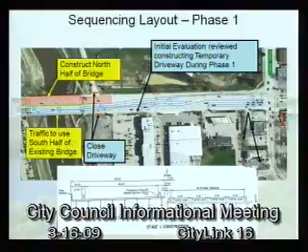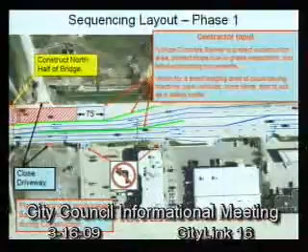As we kept going through this process, we talked to quite a few contractors. One of the main things we heard from almost every one of them is that under this type of construction, we really need to put a barrier around the whole side they're working on, because we have 38,000 vehicles using this street a day. We need to protect that construction area and keep people from driving where they shouldn't. They said the only way to assure that is to put up concrete barrier. So we drafted in some green lines showing where we're thinking of placing the concrete barrier.

The other thing we learned from the contractor is that they need a window of 50 to 75 feet behind the area under construction — a place to put their paver, a spot to park payloaders. Not a large area, but enough for a little setup area for construction. When we incorporate their thoughts, it changes how we look at this area.

Our westbound lanes start pulling further south, and we start losing some of the room we had wanted to use for that left turn lane. So what that tells us is we're not so sure exactly what we can accommodate for access there. A lot depends on where the actual bridge limits end up being. Right now, with the profile grade, we're not exactly sure where that boundary will be or where we need the barrier, but some of the left turns will probably have to be restricted just for safety reasons.

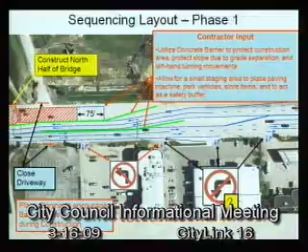For the sequence and layout of phase 2, we're switching — we'll put traffic on the north half of the bridge and construct the south half. You can see on the typical section things are starting to line up, so the bridges will be at the same elevation with traffic on the new portion. The west side of the structure stays pretty similar. We're going to have the retail business on the north use the driveway we constructed.

We still have some driveways that are closed on the north. We're still probably going to restrict some left turns off of Westport and off of the driveway, and we may even have to restrict left turns into that retail business as well, just depending on how much room we have at the end of those construction areas.

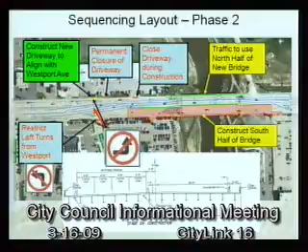Again, we're going to go to the east side of the bridge — traffic on the north half, constructing the south half. We're still going to be closing a couple of accesses. Again, we're trying to accommodate access into those little retail businesses. We've got restaurants there, so we're trying to keep access open, and we looked at an option with a left turn lane again.

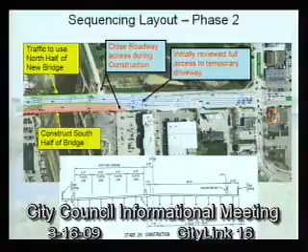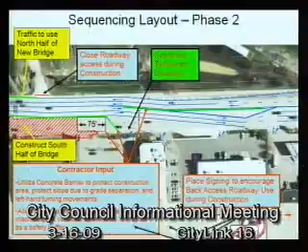After talking with our contractors again, we went back and looked at the approach, and we need to utilize that concrete barrier to give the contractor some additional room. We really don't know what we're going to be able to accommodate for left turns under this scenario, but it doesn't look all that good.

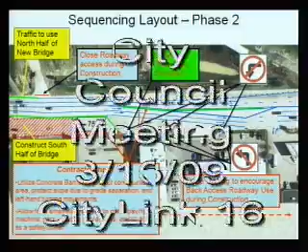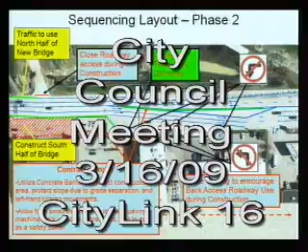It's hard to get vehicles out of those areas to take a left turn across 5 or 6 lanes — it takes a long time, and congestion is going to be heavy. So we'll probably have to restrict some of those movements, but we're going to keep the driveways right-in, right-out at a minimum. Hopefully we can learn more and do more. We'll place a lot of signing encouraging people to use Kiwanis Avenue over to the back access rather than making left turns off busy 41st Street. But like I said, this is our initial input — we're going to dig more into it as we get into final design.

Let's talk about the traffic conditions, existing versus 2 lanes in each direction. This graphic represents our AM peak hour results. We have a couple of boxes, so let's go through the legend quickly. The first box on the left is our existing conditions level of service, with an A, B, C, D, E, or F in the box. The right box is partial closure — the level of service we're seeing with 2 lanes in each direction over the structure.

If you go around our study area for existing versus 2 lanes in the AM peak hour, you'll see that almost every intersection is exactly the same. The reason is that 2 lanes in each direction can actually handle the AM peak periods. If you go out there now, it's kind of funny — you can stand by the mall and see people coming from Marion over to the interstate; it's very busy with a lot of congestion.

They get on the other side of the bridge, and they're going on 41st Street really good. The congestion is really on the other side of the interstate. So during the AM peak hour, we can handle those volumes with 2 lanes in each direction.

The PM peak hour, things change a little bit. Now we start having intersections that don't work as well because we can't maintain all that traffic on just 4 lanes, 2 in each direction, which makes perfect sense because we have 6 lanes out there for a reason. So if you go around the study area, you start seeing D's turn into F's, E's turn into F's. We're starting to have some congestion, but the good thing is most of it is maintained on Western, 49th, and Louise. That's where people reroute or divert to.

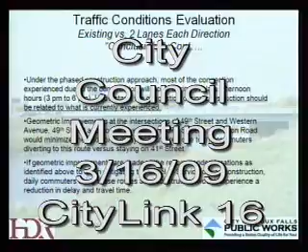Geometric improvements at the intersections of 49th Street and Western Avenue, 49th Street and Louise, and 57th Street and Marion Road would minimize the additional delay encountered. So we looked at those intersections and how they are impacted.

We also looked at, well, if we added a right turn lane or a left turn lane, what would that do to the delay? We found that with some very minor improvements, we can get those intersections, even during construction, to almost operate like they did before. And at 57th Street and Marion Road, in the options we're looking at, we also see this small percentage that diverts no matter what—they just don't want to go through the construction area.

We see that a lot of people want to use 57th Street. As they're coming from the west side of town, we're seeing a lot of people use Marion Road over to 57th Street, and we're starting to see some congestion there. So doing some improvements at that intersection would be well warranted.

If we do these geometric improvements at these locations, we basically get a lot of bang for our buck because most of the improvements are needed already. So we can do them now to help during construction, but we can also actually improve conditions after construction.

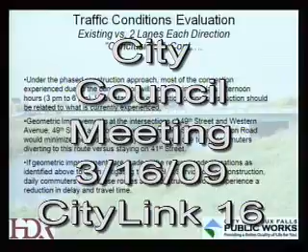Some phased construction advantages: impacts to the adjacent arterials—49th, Western, Louise, 12th Street—in the AM peak hour are insignificant, really. Delays increase on the diversion route, Western to 49th and Louise, but most of the other study intersections experience little change in the PM hours.

The city engineering staff—on all your construction projects, you have your city engineering, your traffic staff that's going out, playing with the controllers, and updating timing plans, making it better for all of us to get to work and get home. Under this scenario, with the limited staff up there to do that, they can handle this because we think a lot of the intersections, we know where they're going to be. They're probably not going to be more than a handful, so they can adjust those timings to help things out.

Businesses are anticipated to favor the phased construction option. That's just from all the projects I've been on - if we can keep traffic moving in front of their business, they seem to be happier. That's really my observation, though it's definitely not gospel, just something I've seen from the projects I've worked on.

Delays during off-peak hours will be minimal, as 2 lanes in each direction have enough capacity to facilitate the traffic volumes. That's important because we have an AM and PM peak, and probably 20 hours of the day where volumes are a lot lower. So if we can accommodate those volumes without increasing the delay all that much, that's beneficial to the traveling public.

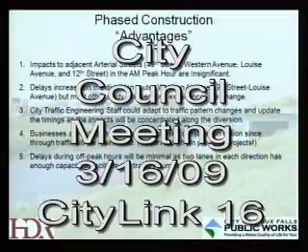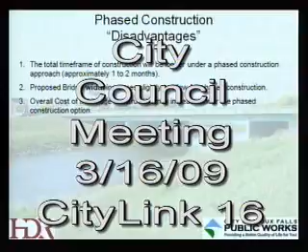Some disadvantages, of course, we always have some. The total time frame of construction will be longer, approximately 1 to 2 months under the phased approach. The bridge width actually increases slightly under phased construction, so we can incorporate 2 lanes in each direction for the duration of the project. And the overall cost of the bridge construction may increase under the phased option - not much, but it could increase just because our bridge is a little bigger.

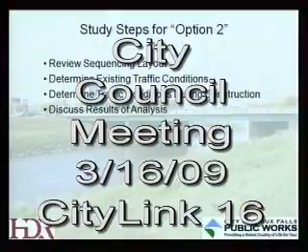Option 2: close 41st Street between Louise Avenue and Kiwanis Avenue during construction. Again, we're going to go through the study steps - review sequencing layout, determine existing traffic conditions, and compare them against what happens during a full closure, then discuss the results.

The sequencing layout is much simpler for this option. We're going to go in and close the entire structure. We'll detour traffic at 41st Street and Kiwanis, build a couple driveways so people can get in and out of their businesses, and put a lot of signs up and down the interstate saying 41st Street is going to be very congested, the bridge is closed, stay away.

Now we go to the PM, and realistically things look that much worse. Almost every intersection, at least in the box we're looking at, is starting to fail, and this travels through the area - it's not just what we're looking at here, it's really the whole study area. We're having many, many problems trying to keep these roads up and working.

So let's go to some of our conclusions. The AM peak hour results and PM peak hour results indicate that a full closure alternative would cause significant delays on our study area streets. Based on the traffic patterns, individual intersections throughout the study area will experience additional delay.

As I mentioned before, it would be difficult for traffic engineering staff to run around and change timings at all these different controllers and keep things running as well as they can. There's just going to be too many problems. And traffic capacity to the extent needed to facilitate a full closure doesn't exist out there, so things are just going to break down to a point we can't recover from.